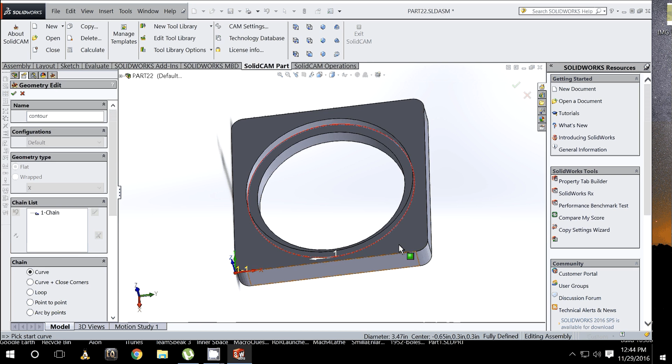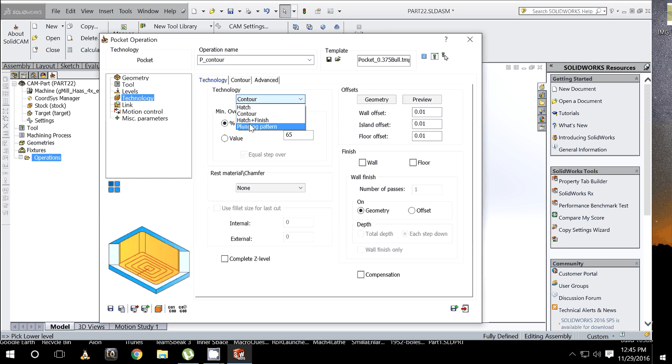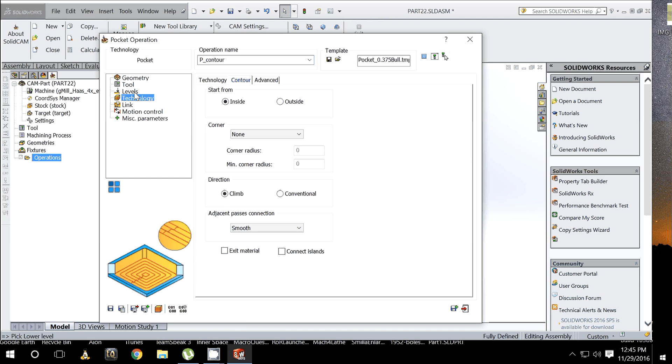And so it's going to try to define, it says it's automatically defined. And if you like where the zeros are set, it's the top of the part in the center. If you like that, go with it. If you don't, I'll show you how to change it. So to change it, you go to CoordSys Manager, open it, click the edit button right there, and then you can just select a face, which will, you can see there, that's a good way to do things. So let's do it there.

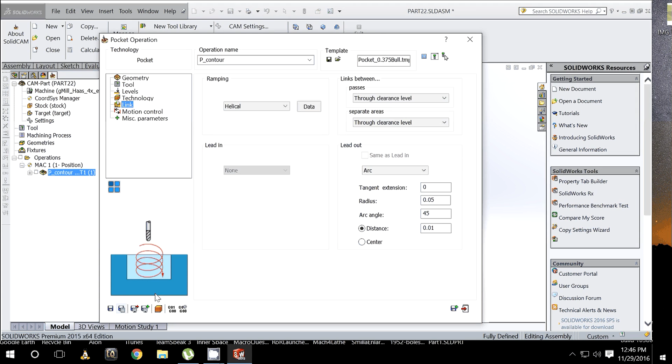Choose that, and in this box you can choose your tool start levels. So I always set that at 2 or 1.5 just because the gantry is not real high. So you can see the part upper level is now 0, part lower is a -1/2 inch. So that looks good to me.

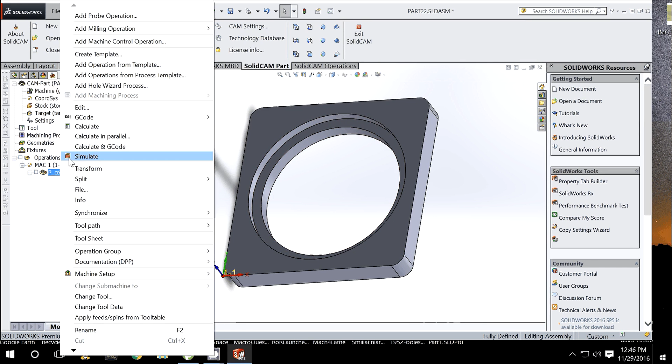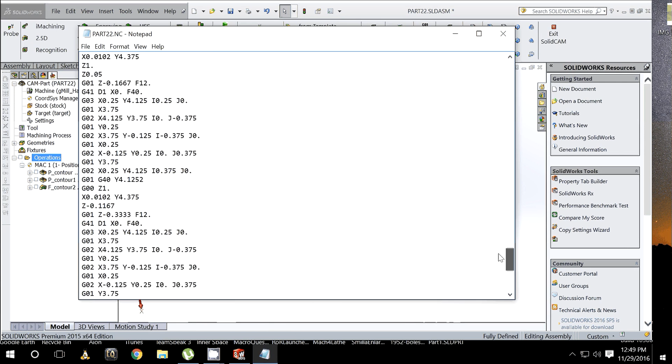Okay, so to start machining it, you right click operations, add a milling operation, and the first one will be a pocket. In this box you choose geometry, so we'll click this button here to select geometry, and I just select this circle here, and you can see it recognizes it as a closed loop. So that's all we need to do there. We'll select a tool. Let's use a 1/4 inch end mill.

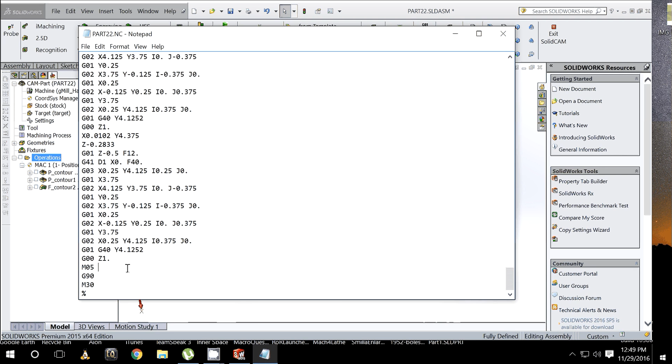The levels, this is kind of how this program works. You click upper level button and choose the top, and you can see 0 in this box. The pocket depth, you'll click literally the pocket depth, and you see -0.2. And then we can say equal step downs, if it's a deep pocket. This pocket will just do it with a single pass.

And the technology, you can choose these different, like there's a plunging pattern, hatch goes back and forth and then finishes the walls, but I just like contour. Choose to start the inside or outside. You can climb or conventional mill. You can do these different styles of step over.

But the link, this is basically how it ramps in. You can do it vertically, but if your tool's say a fly type cutter like on a wood router, then it can't cut in the center, so you can't cut vertically. So we can do a helix, and we'll set it to 10 degrees or so. It's an aggressive helix entry.

And let's calculate that path and see how it looks here. You can check this box. You can see the tool path, the helix goes down, and it cuts the part. Okay, so we're happy with that one.